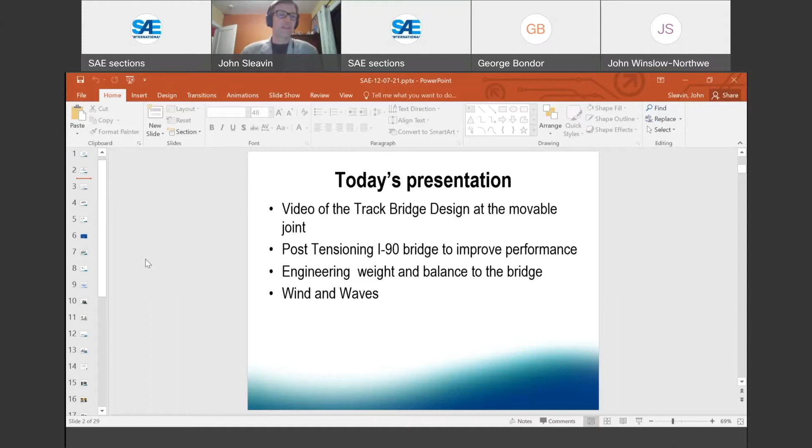So that's what today's going to be about — the challenges and the opportunities that we've looked at. Today's meeting, I'm going to go over a video of the track bridge and the movable design. We're also going to talk about post-tensioning that was added to that bridge, the engineering of weight and balance on the bridge, because the bridge is really a marine vessel that can't go into port. So keeping the weight, balance, and trim on that is very important. And then a wind and wave analysis. These are just some of the many challenges about putting light rail on the floating bridge.

So starting out with the track bridge — what is a track bridge? That's the bridge that bridges the rails from the fixed bridge to the mobile part of the bridge. If you're familiar with docks on a tidal place where the bridge goes, the dock would go up and down with the tides. The bridge does the same thing because the lake level changes. There's a transition slab between that movable part and the fixed part, much like a gangway between a boat and a dock.

So at each end of that gangway is a joint that cars kind of drive across. It's currently an accordion joint, but accordion joints don't work very well for a fixed rail system to go across it — that was our challenge here. There's 6 points of movement at those 4 different interface points.

Part of this development, we needed to define success, what we wanted, which was a comfortable ride at 55 miles an hour, our maximum operating speed. We also wanted to find what was acceptable going into this, so we knew our parameters. We thought if we had to slow down below 35 miles an hour at those joints, we really needed a different system and go back to the drawing board. Our goal was 55, definitely no less than 35.

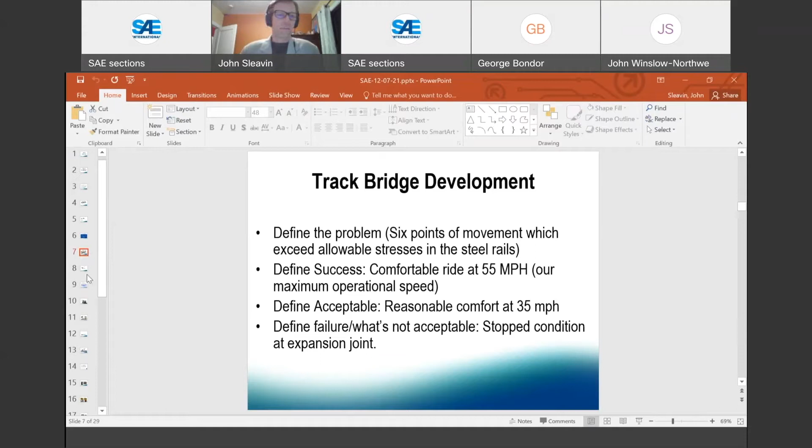So the evaluation criteria we were looking at was operating speed, speed restrictions from wind and waves or environmental issues during different times of the year, reliability, maintainability, and inspection. Once you open a rail system, your riders expect a very high level of service and maintainability. Making sure this track bridge system didn't require a lot of maintenance or have to go out of service and interrupt the connection between downtown Seattle, Bellevue, and out to Redmond, which is where a lot of the high-tech industries are located. Of course, ease of fabrication, initial costs, long-term operating costs, and customer impact. That's the last point, but really it's the bottom line, and that is the customer.

And our customers are those people who depend on this service daily.

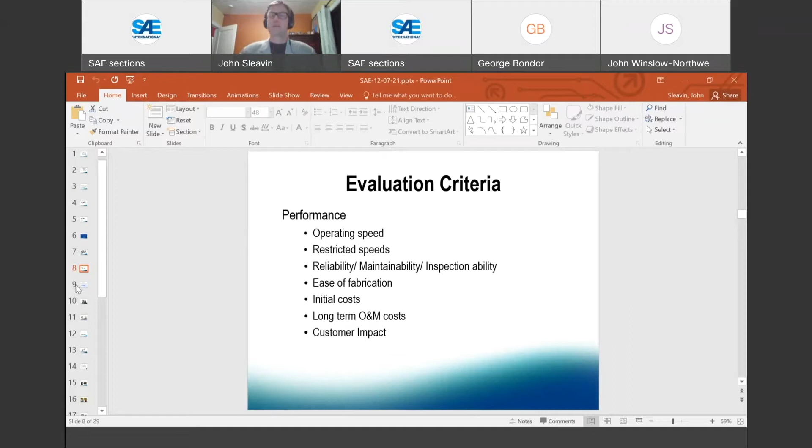So what did we come up with? We came up with what we called CESURA, which is a curved element. I'll play a little video on this, on what we're looking at here.

Essentially, what we have are 2 curved elements that each rail sits on. Those 2 elements, which are in blue, sit on 3 points, and we'll see that from underneath. Those 3 points are like a 3-legged stool. Why 3? Well, we all know that 2 points define a line and 3 nonlinear points define a plane.

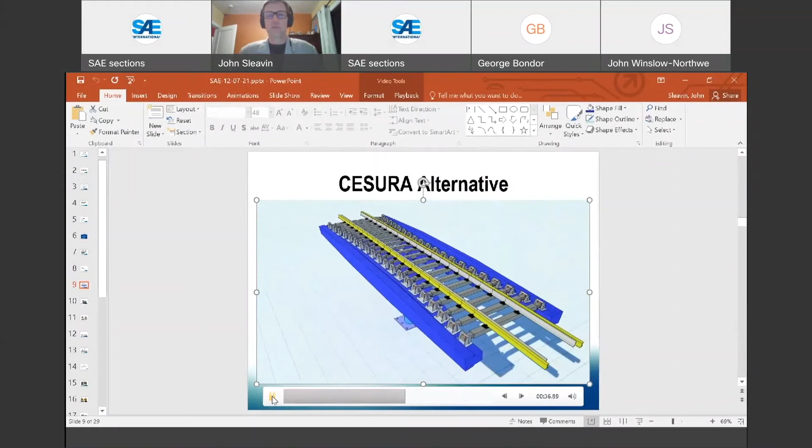So if we set these curved elements on 3 points, as that bridge goes up and down and flexes, each one of those wings, those blue sections, will always be in a plane. Now, if we attach the rails directly to those, then those rails would move apart and get closer together, and that wouldn't work very well. So we set those rails on top, because if they moved apart or got closer together, the train would derail or come off the tracks. So we set those rails on what we call bearer bars, or ties, that sit in each wing.

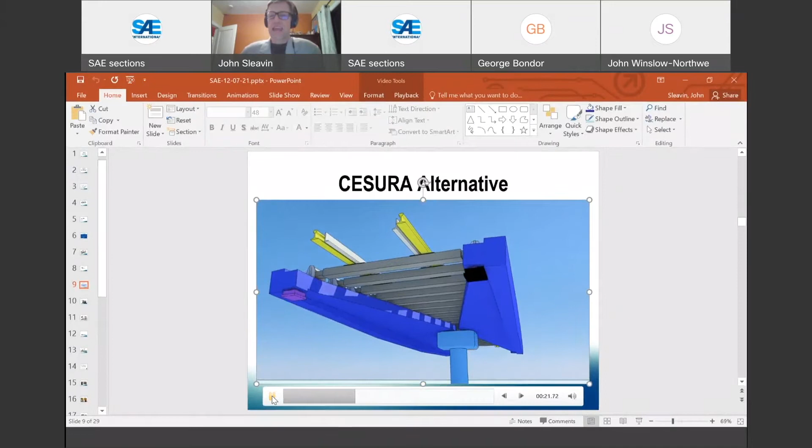Let's play this video again. As you can see, this bridge has an accordion joint that connects the fixed bridge to the moving bridge. So as that bridge moves up and down, the floating portion, this rail flexes to that position and allows that transition, a point transition, over about a 40-foot section.

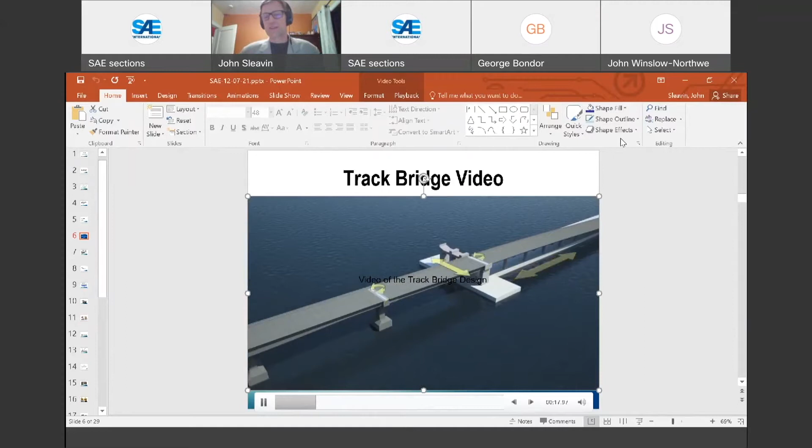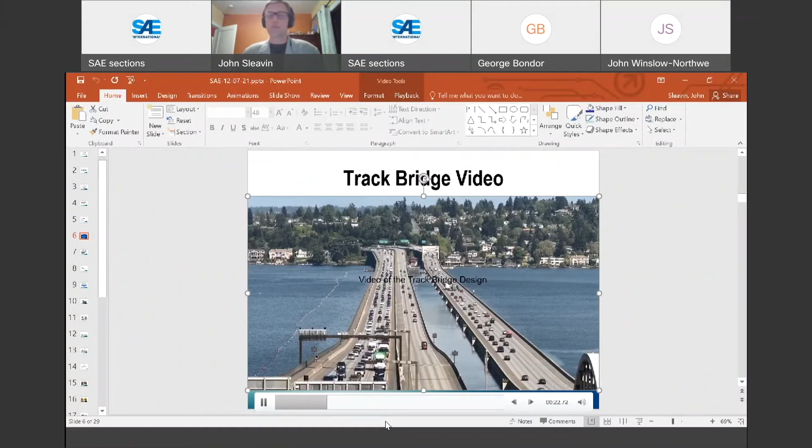So again, backing up here — what you have is a floating bridge on Lake Washington, and there are 6 different ranges of motion. The lake goes up and down as the temperature expands and contracts the bridge, and the wind twists it from left to right, or the loads of traffic twist that bridge from left to right.

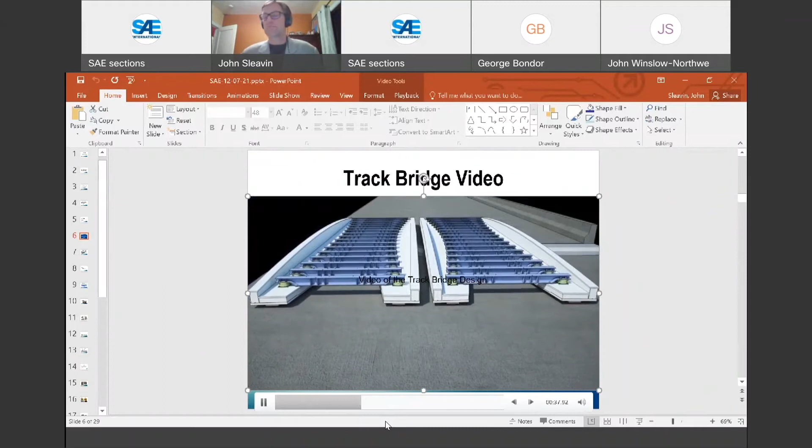So we put these 3 points which each of those wings sit on, and then we put bearings on top of that and connect the bearer bars across, and the rails on top. So as the lake goes up and down, we take that point movement and turn it into a vertical curve up and a vertical curve down.

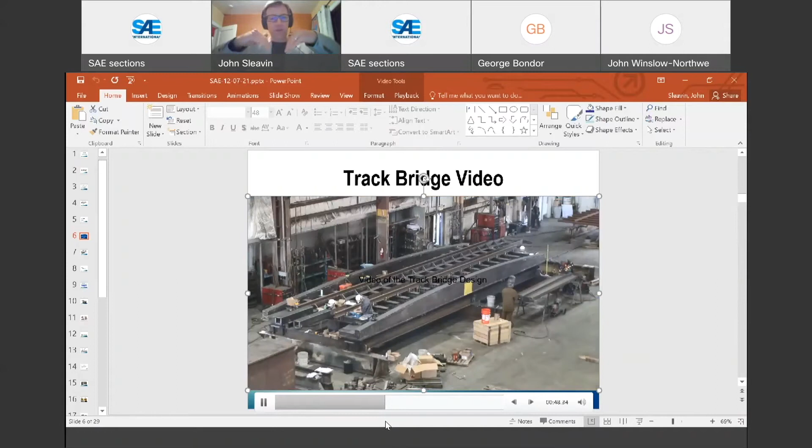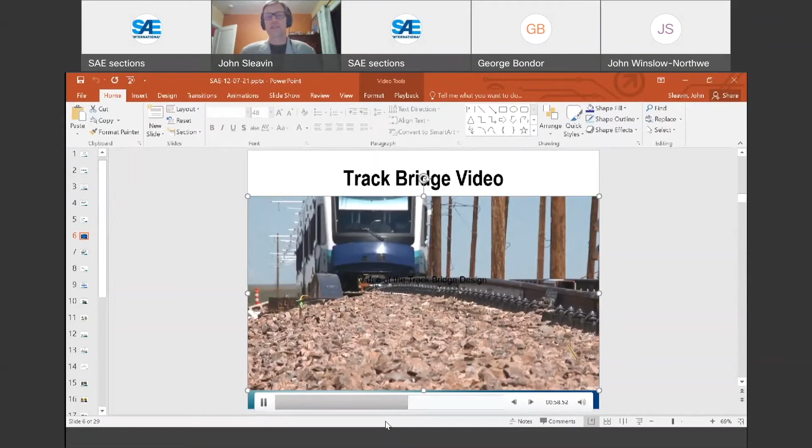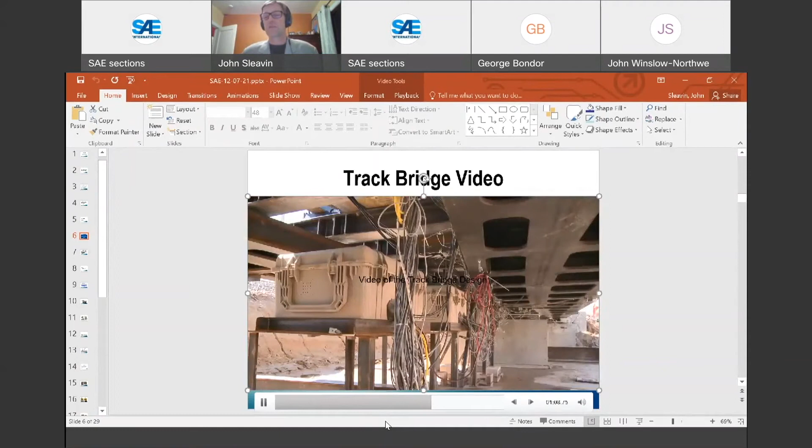So we went to Jesse Engineering Tacoma, built 2 of these prototypes, and then brought them to Pueblo, Colorado, where there's a 50 square mile test facility for rail. We built a mile-long track and mimicked the lake movements, and put 500 channels of testing on both the train and the track to understand what was going on with each one of those.

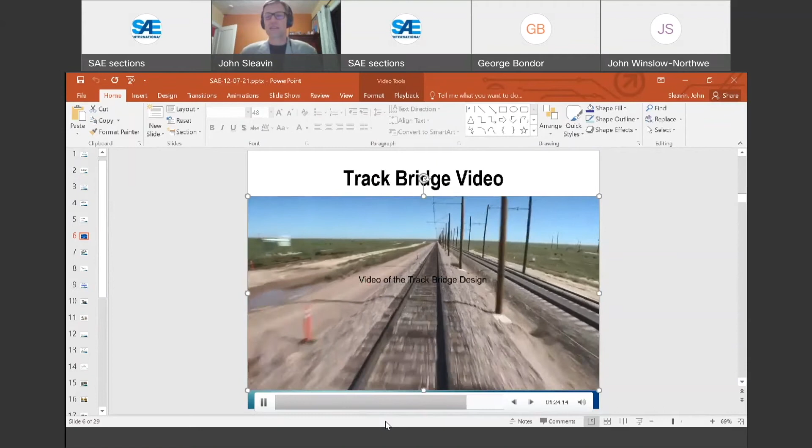So we put a lot of forethought and effort into this. We shipped two of our cars halfway across the country to run on that. So these are actually the Sound Transit vehicles in Colorado running on these.

Before we even built it out there to test it out, and what we found with all that testing was that at the design speed of 55, it actually worked pretty well. It had a smooth, comfortable ride. So it was great to check back in with that and make sure everything is working well.

And then here's just some of those pictures from Pueblo where we were working on, where we had built that track bridge. Clearly this was a lake during the end of the last ice age, but now it's just a huge flat plain. So we would jack the rails into the different positions as if the lake had moved.

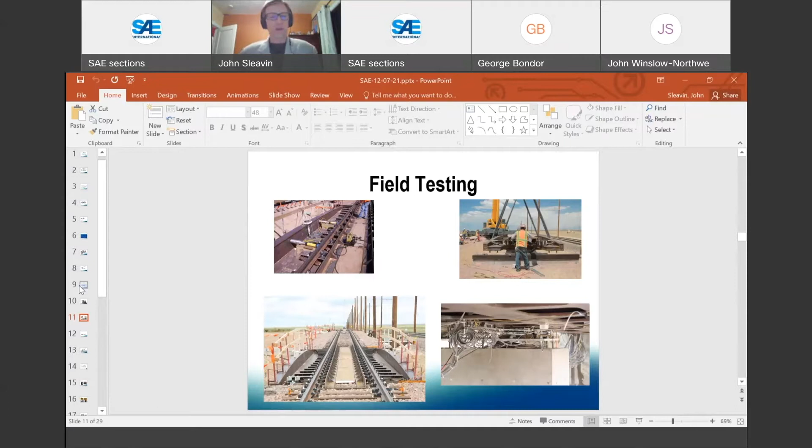And while the lake goes up and down, it moves about 2 feet from high to low, from late winter at the low to spring at the high, and then all summer long it slowly drains down. So the motions are very slow. But we proved all these different motions. We tested it out.

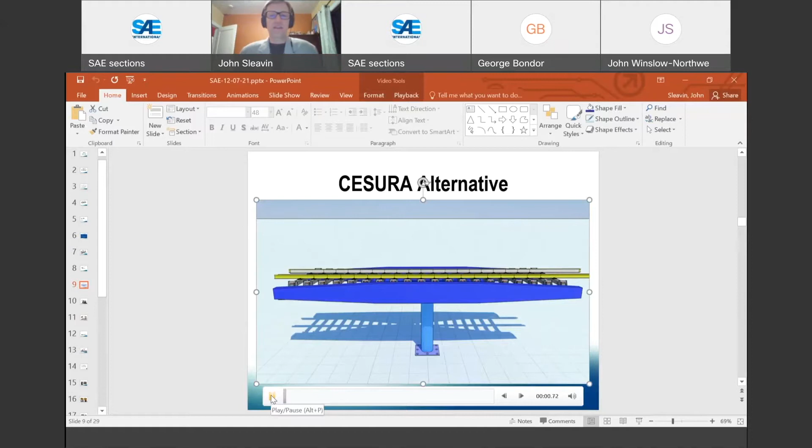And I think the big point here is that what we used on these components, it's not new and innovative, never done before. Most of these elements are off-the-shelf things. The ties that connect the rail, that's a system that's used today.

Underneath the bridge, what we set these things on, they were bridge bearings that you see at the seats where a bridge has expansion joints. Where the rails, the bearer bars, connect to the wings, we use what are called double pendulum bearings. Again, those were developed in California and they're used on bridge technology, never used in this situation, but we took that technology and used it here.

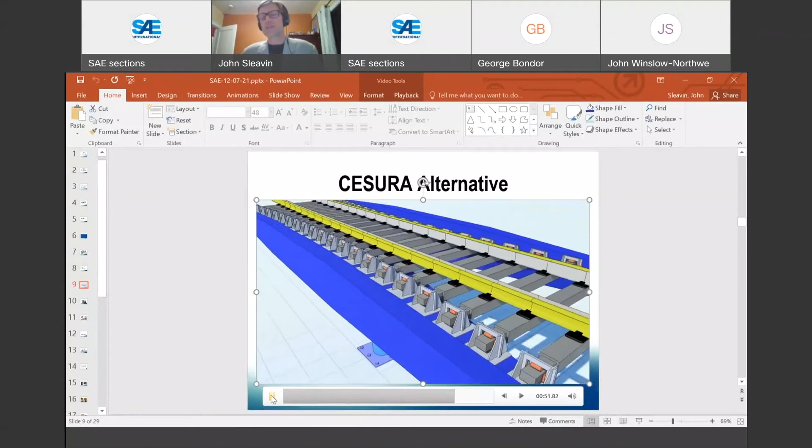So we try to take off-the-shelf components, arrange them in a different way, and then apply it to this. And we took what was theoretically, in the computer, over 70 KSI stress in rail that can only handle 60 KSI before it snaps, and brought it down to about 3 KSI of stress in those rails from these movements. So well within the working range of that system.

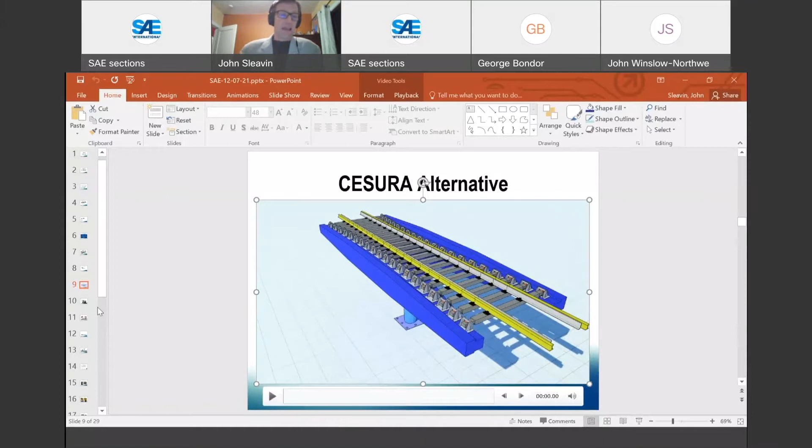And we did it by a lot of advanced planning. We did computer models first, of course, to simulate this. We then did a full-size component mock-up and brought that to the University of Washington Structural Lab and tested components there. We didn't actually learn what we were expecting to learn there, but we did learn how to put it together a lot better. It's just too small a facility.

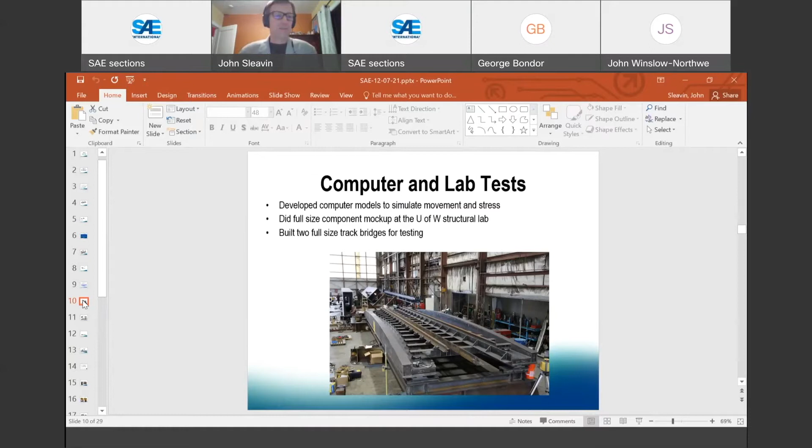So our next step was to build these two full-size bridges, which we did down at Jesse Engineering in Tacoma, and shipped those to Colorado and tested them there. Again, those are the photographs.

And I guess the big takeaway on this is, granted, no one else is probably looking, since this is the first time in the world anyone's put light rail on a floating bridge. Not likely a lot of other people are doing this in the future.

But the takeaway was define the problem. We had a lot of folks that wanted to define the problem. We had a lot of people who wanted to define the solution, jump to that next point. But we really stressed defining the problem, going through it systematically, defining failure, what worked and what didn't, to sufficiently get us there. There are some smart people who really wanted to jump to some other ideas, like, well, this is the right thing.

There's some concepts called 3 beams that have been used on suspension bridges, but those only have 4 degrees of motion versus our 6. Before going there and trying to retrofit that, we really had to step the team back and make sure they were looking at what's unique, what are we doing here, and that really helped streamline this.

Also, again, as I mentioned earlier, off-the-shelf components. What are those things that we know how they perform, what they do? How do we incorporate those known types of items into this product so everything isn't new? What we're doing has never been done before, but let's not make it super complicated by making everything new. The more we can use proven products, the more those things don't have to be tested, and we can test the system rather than each individual item. And then, of course, we refined these products as we went through this process.

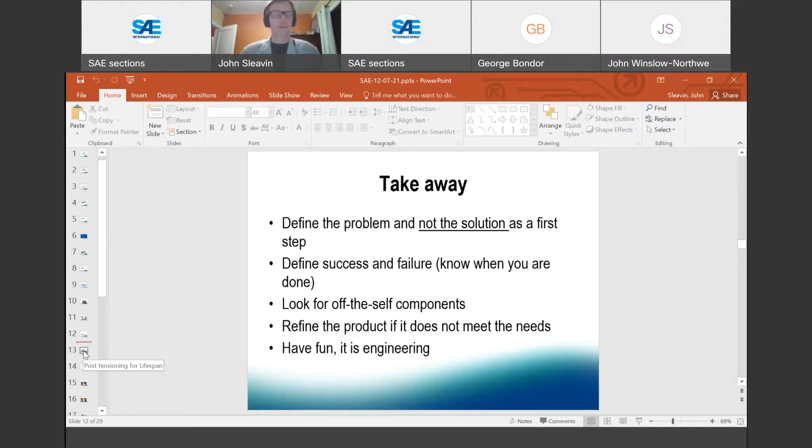There are also other challenges on this bridge, not to think that just that expansion joint was it. One of them was the lifespan of this bridge. As was mentioned earlier, there have been a number of floating bridges that have had challenges. These are the longest floating bridges on Lake Washington anywhere in the world, and they're serving interstates and 6-lane highways. So they're large bridges. This one on I-90 is a mile-long floating bridge.

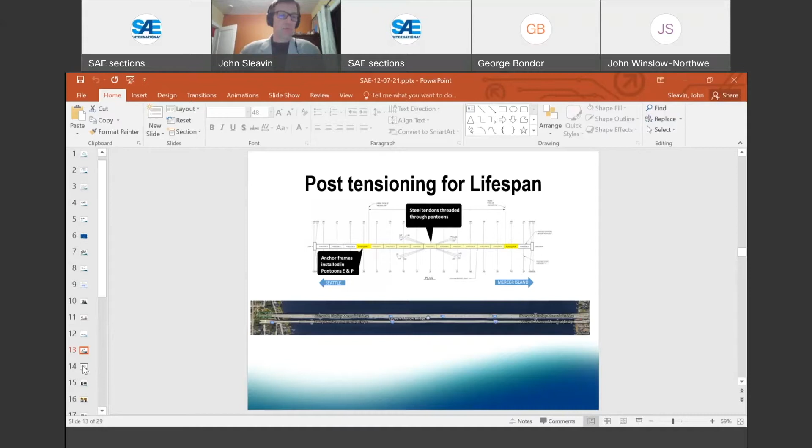So we're doing a major investment putting light rail on this, so we wanted to make sure we had a good lifespan for this bridge. In investigating it, we realized that the way this bridge was constructed was great. It had to fit through the locks that connect Lake Washington to the saltwater in Puget Sound. So this mile-long bridge consists of approximately 400-foot wide long pontoons that would fit through those locks and come into the lake. Then each of those pontoons were bolted together, and a bridge deck with cantilevered sections on either side were hung off this to make the final road surfaces.

Each one of those pontoons consists of 5 cells wide and 10 cells long, and it's essentially like a submarine inside of each one of those cells. So each one of them is individually watertight to make sure in case something were to happen and get a crack, a leak, it's very contained. But each one of these pontoons was just bolted together.

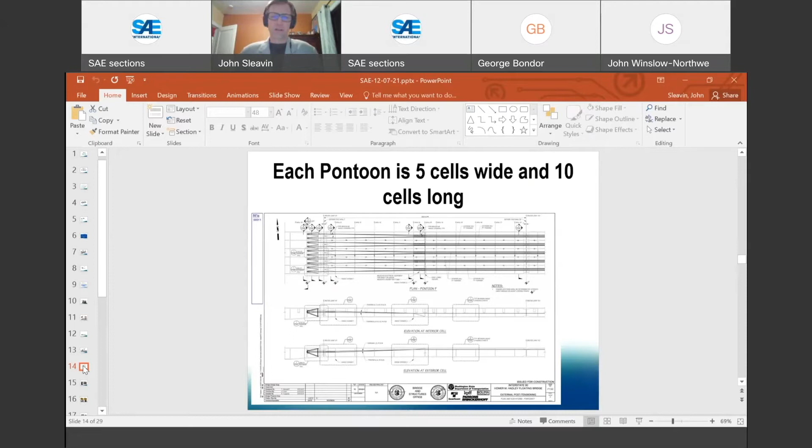What we decided to do was post-tension this bridge 20 years after it was built and do a mile-long post-tension. As far as we know, it's the longest post-tension ever done in the world, and it was retrofitted into this bridge. So that took a lot of engineering analysis. Inside these pontoons, we had to put in reaction frames to jack these cables against and do the post-tensioning.

So again, we went to Jesse Engineering in Tacoma. They built up these jacking frames that would hold those cables that we'd eventually jack against.

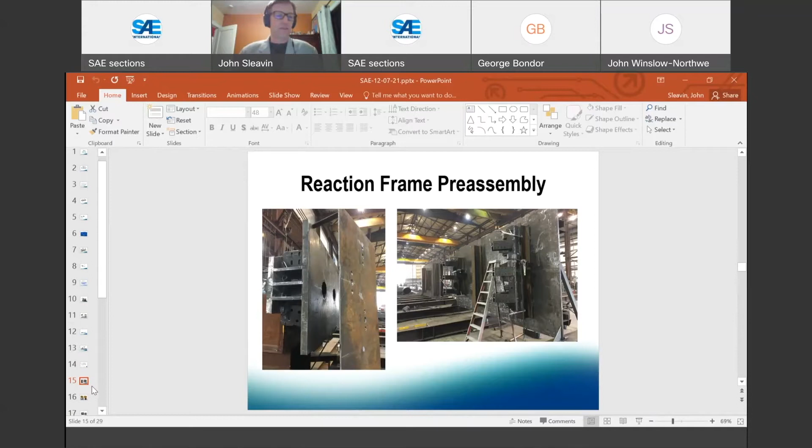But they had to be installed into this bridge. Like I was saying earlier, these things are 5 cells wide, 10 cells long, and each one of these 400-foot segments totals a mile long. We had to break that jacking frame down into small pieces, lower it through a hatchway in the bridge, which is a maintenance access.

And then, where I said it's like a submarine, there are marine doors between each of these pontoons that we had to move each of these pieces through to the end of the bridge and then install them. Once they got into that end pontoon, they had to be within 1/16 of an inch where they met up against the concrete surfaces, because we were going to be jacking them with a lot of pressure against that. So again, we used LIDAR, a surveying technique, to understand where all that bridge work was, mocked it all up, measured it, and then brought all these pieces in one at a time.

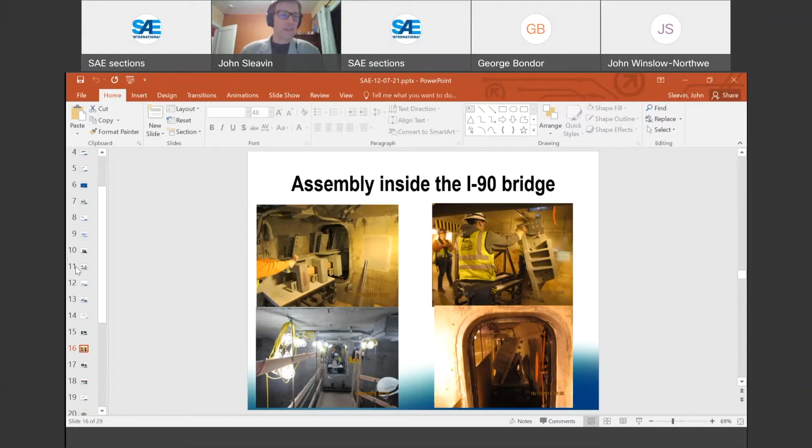And then here's just some more pictures of where we brought that jacking frame in on the right, poured a concrete blister up against that. And on the left, we're kind of looking down where those cables are going to come out of those holes.

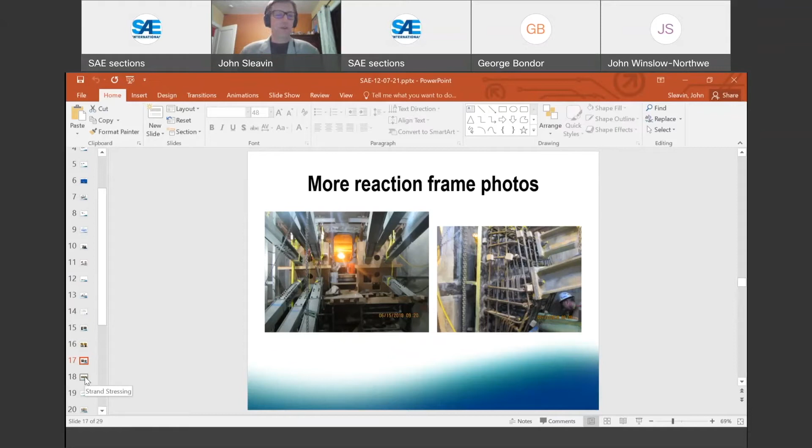This is one of the 5 pontoons on either end of the bridge that we were going to pull and jack this from. In the end, after we post-tensioned that bridge, we shortened the length of that bridge by 4 inches. So think of concrete as not very compressible, but in a mile, we put that much force into that. What this did is greatly increase the strength of this bridge and made it act as one continuous unit.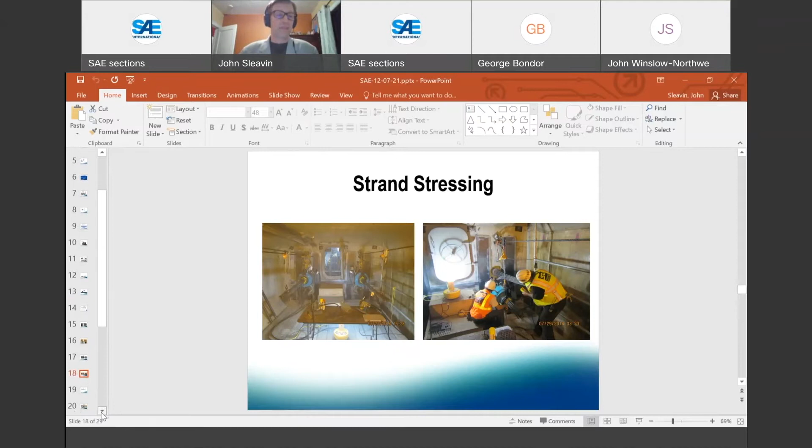Much as the way that a lot of bridges are post-tensioned. So that alone, we think, added a lot of strength and brought up the design life of this bridge, so it'll be serviceable for many, many more years once the light rail begins on this project.

Other challenges on crossing the bridge was stray current. Our light rail system operates with an overhead catenary system, and the rails themselves are the return current. So that means that we have electrified current running across those rails. We have to make sure stray current doesn't come off those rails, get into the bridge, and then start a corrosion process on that bridge.

Again, it's a marine vessel. It sits in water. While it's fresh water, it's a very conductive medium. And getting stray current into the rebar of that bridge would accelerate the corrosion of that bridge and obviously greatly shorten its lifetime.

We also have to attach those tracks to the bridge. Our normal system of how we attach to an elevated bridge would have required somewhere around 18,000 holes drilled into an existing bridge deck that was post-tensioned transversely. While we post-tensioned the length of the bridge deck, side to side was already post-tensioned. So we couldn't really risk harming any of those penetrations.

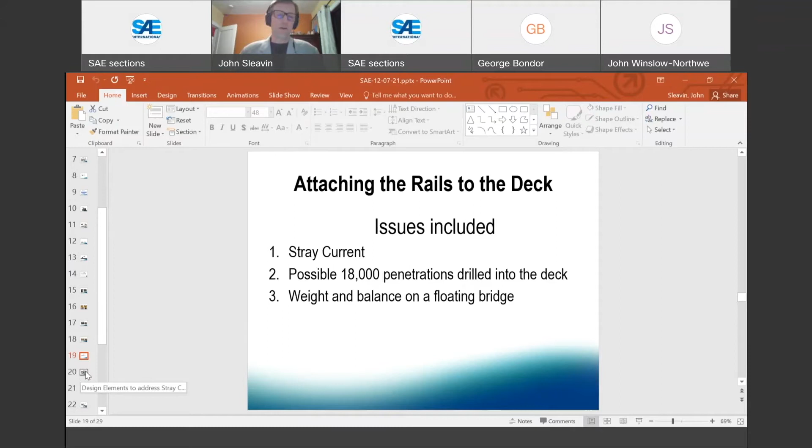And then finally, we have the weight and balance. This is a marine vessel. We can't lower it too much in the water or twist it from one side to the other.

So on the stray current, we went with belt suspenders, and I like to say belt suspenders and someone else helping hold up your pants. So you see the rail on the top there. We have a clip beneath there with a high isolation fastener, or basically an isolator.

Underneath that, we used a high isolation material for a drip edge. So any water that would fall on the rail would then come to this cap and it would flow off the side. So any electrical current that might come off in a rainstorm wouldn't have a continuous path to the deck, because the drip patterns would keep that water from being continuous.

Underneath that cap, we put a steel band around our concrete plinth to pick up any stray current that might be on the surface of that block. And then what you see there is a little nub coming out. We connected each one of these stray currents with a wire, one to the next, and brought all those connectivity points off the bridge. So any stray current that got into that band would get picked up by this wire taken off the bridge before it could get into the bridge deck.

And then on top of that, we did a high polymer coating on top of the bridge deck around the rail. So if even some more current got down there, it couldn't penetrate through that. So again, belts, suspenders.

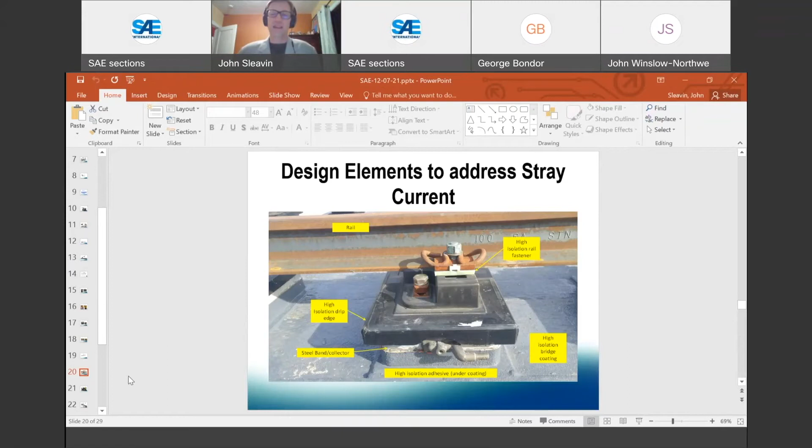We wanted to make sure that we did nothing to harm this bridge and everything to preserve its life. It's a huge investment that the national government made in the interstate system, that the local taxpayers made by their match and by them voting for light rail as well.

So how did we attach to this bridge? We said we didn't want to put 18,000 holes in there. Well, first of all, we took the plinths. The design on those was a very lightweight concrete. So we used almost a pumice in those because we didn't want to add too much weight to this bridge deck. Then after we poured those, underneath it, we poured a material called Cork-O-Last, which is sort of a spongy epoxy, if you will, that helps absorb vibration.

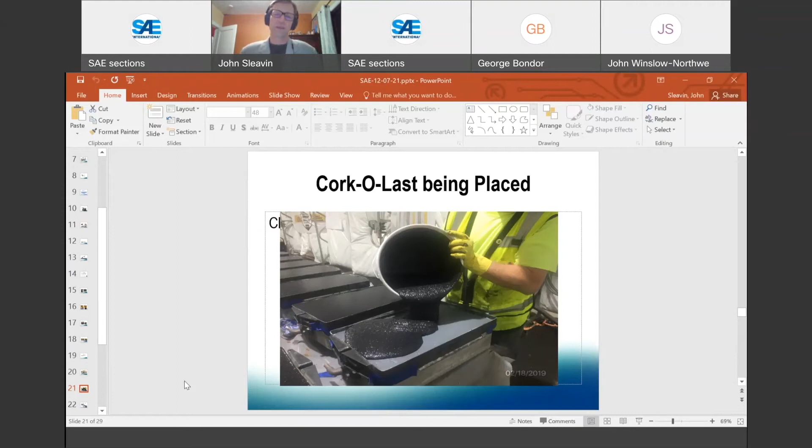And then those blocks were brought out and poured, jacked up on the rails, and we poured a two-part epoxy underneath them to basically glue these down to the bridge deck.

Now, we're not just gluing and hoping it works. Again, here we did a lot of testing. We looked at some materials that have been used in Europe for similar but different purposes. We took those to the University of Washington lab. We pushed them, we pulled them to make sure that they didn't stick to the deck so much that they'd rip the deck off for some reason if they were pulled too hard. They failed in the material themselves, so again, we wouldn't damage the deck of the bridge.

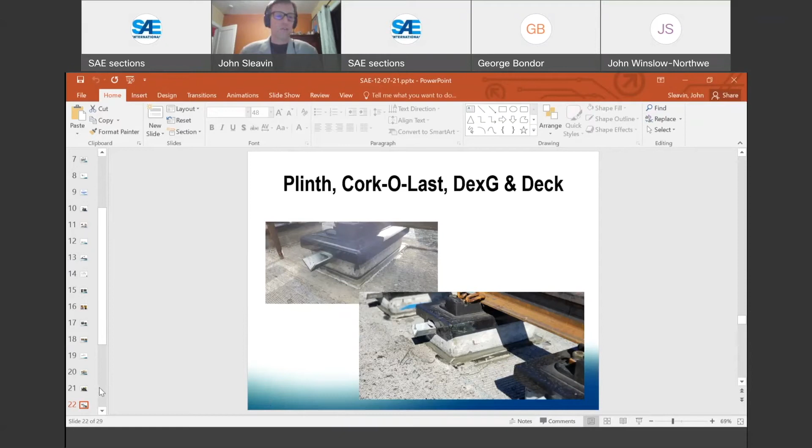We also sent a few of these blocks to Chicago and did accelerated environmental testing. We did freeze-thaw cycles on these things in an oven-freezer sort of element to see how they lasted long term. Again, a lot of testing, a lot of thinking about how these all work together to ensure the long-term durability.

Here you can see the completed system where we've got that polymer on the deck, and we've got these blocks that we've connected. Rather than normal railroad ties, where you'd have a continuous block across, since weight was a big issue on this bridge and we didn't want to load too much weight, we connect each one of those blocks with a steel rod, which is a lot lighter.

Each one of those rods also has an isolation between them so we don't pass currents between those two rails. That third rail you see is what in the train industry we call a guardrail. In the highly unlikely event that a train were to derail on a tangent section, that rail keeps the train from going off the tracks too far—in this case, off the tracks and into the lake. Obviously not something we want to have happen, so this guardrail catches it. That's an industry standard used by freight railroad companies. You'll see it in a lot of places on railroad bridges, making sure they don't have any derailments.

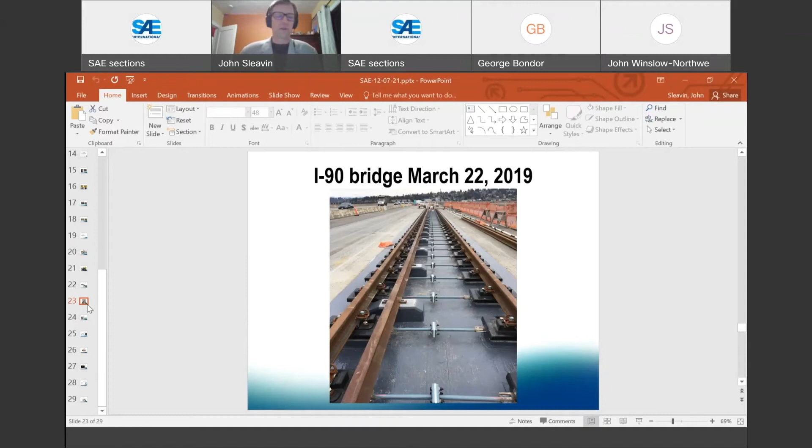But we wanted to look at how much stress is going into this, how much stress are we adding to this bridge based on the light rail. This bridge was built under different engineering codes at the time, bridge codes. They're not seismic codes, because there's no seismic activity on the lake, but wind and wave are one of the big drivers. So we wanted to reevaluate all that and see how much effort was coming into the bridge.

We also knew that in a huge storm, the State Patrol will sometimes stop operations on the bridge. So we want to understand environmentally, when we get a big storm like that, are we adding more stress to this bridge? Do we need to start removing automobile traffic or light rail traffic to take some of the structural load off that bridge, since that structural load is being eaten up in a major storm event?

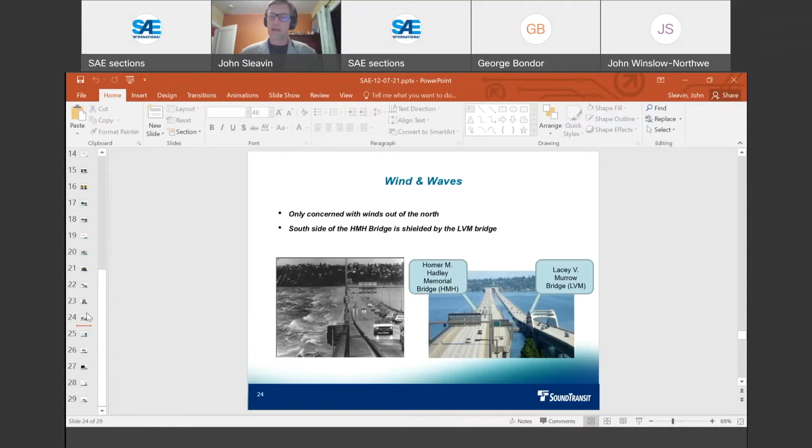So we had to do a big study on the wind and waves—where they're coming from, what's the fetch on this. We had marine engineers involved in this project, and climatologists looking at where these storms come from. We actually learned that while the design was based on a storm from the south, which is where most of the large storms come from in the Seattle area, we do get some freak storms that come from the north, and the fetch, or the distance the lake has to build up waves, is much greater to the north than it is from the south. So that became the design storm, which was different than when this bridge was built.

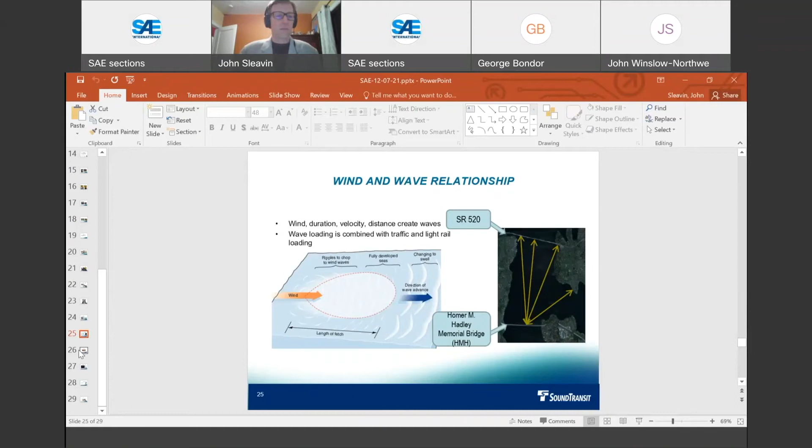They had assumed the storm was out of the south. So that was, again, part of the reason we wanted to post-tension the bridge, and then understand at what point maybe we wanted to start mitigating the loads on this bridge by reducing the traffic.

What we learned is that the average wind speed, about 25 miles an hour, really has no impact on what we're doing. But when we get to about 30 miles an hour sustained wind—these aren't wind gusts, but a sustained wind over a period of time—I'll get into how we measured that.

What we'd probably do at that point is mitigate by only single-tracking, putting one train across this bridge at a time, making sure we have a system to only allow one train on the bridge. That takes a lot of the load, because the design is two trains on that bridge right next to each other with four full lanes of traffic on the other side—so a fairly loaded-up bridge. By making sure one train is not there, it really lightens the load. How does that impact our customers?

Well, it takes a little over a minute for the train to go across this bridge. And we have 6-minute headways or 8-minute headways when we open, probably 6 in the future. So really there'd only be every 3 minutes a train crossing. So theoretically, only allowing one train on the bridge at a time shouldn't impact our service. But sometimes, just the way the service runs, you might have 2 trains out there. So probably relatively little impact.

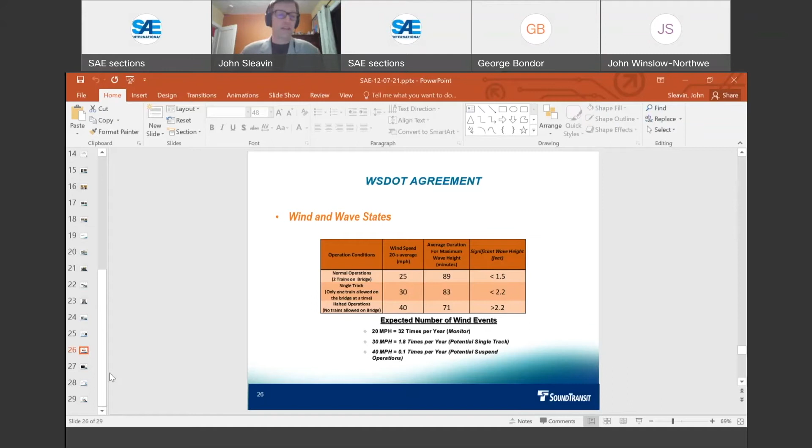And again, the most important thing is making sure this bridge survives. And then WSDOT also has the ability to then take traffic off at about that speed too. Generally, they tend to take traffic off because when the winds get that high, cars start swerving between lanes, and it becomes not so much a bridge structural load, but more of a traffic safety load for drivers not staying in their lanes. And that also then would greatly reduce the stress. And then once the winds drop below 40 miles an hour, we start the operations again.

But we had to figure out, really we're basing this on wind, but what we care about are waves. If you think about it, you're out in the environment, you get hit by wind, it kind of knocks you around. If you've ever gone wading knee deep into an ocean and a wave hits you, it'll take you off your feet, and that's just a small wave. So really what we care about are waves. So we had to figure out how to translate wind and direction into a wave height that actually adds structural load.

So here's a case where, instead of world-class scientists, we partnered with college students doing their senior projects, who came to us and said, what do you have? What can we do? What can we work on? And we talked about this. They found these buoys that do wind, solar buoys we put out in the water. And for a year and a half, they monitored the different wind, the waves, how those correlated, because this also had an accelerometer on it to tell how high the waves were.

So then we could correlate wind direction, wind speed, length of time, and when waves build up, so that eventually we can just measure the wind and the direction, put that into an algorithm that tells us what the waves are, and where we have to have a problem. Because if we have 40-mile-an-hour wind, but it's going east-west and not building up waves, we really don't have a problem. So again, we reached out, we used the community.

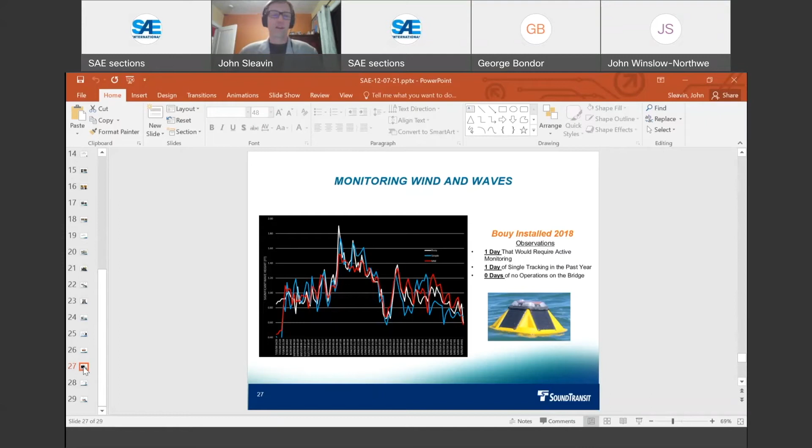In this case, we used a lot of students that had a lot of enthusiasm, spent a lot of time researching on the internet, doing different things, putting these things out there. It was a great project, and we learned a lot. Clearly, it took some of Sound Transit staff time to work with them, but I think it really helped develop a lot of our young engineers, which is so important.

And these are just some of the monitoring and the waves and what came out of it, the data that they came out with.

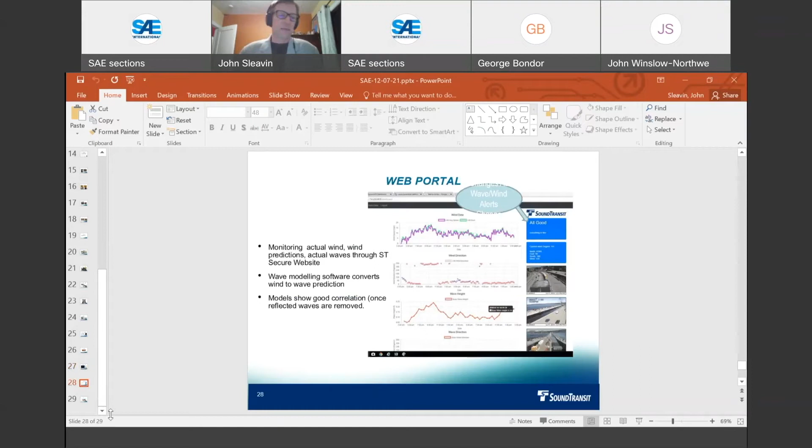Essentially, it was a project we had to think about from top to bottom. We had 23 different critical items that the independent review board talked about, that WSDOT and the feds, Washington State Department of Transportation and the Federal Highway Administration, said until you answer those 23 questions, you can't put light rail on this bridge. And that was great, it was an independent group. It was arduous to go through, but it was important. It gave that independence, they looked at it, set up a lot of things, and we found a lot of other things since then going through their issues, to really make sure we thought about each one of these questions. We took a lot of time.

This is a critical piece of infrastructure, today as just an interstate, but in the future as it connects transportation. The takeaway I'd really like to put out is using that community, using the young engineers of tomorrow, using those knowledgeable engineers from all over the world, all over the country, listening to them, understanding what they're saying, taking that time to make sure people could question you, and that you were open to those conversations.

Okay, my first comment is thank you very much for this very detailed explanation. I now have confidence I can drive across the bridge when the train is on the bridge. But I do have a question. You mentioned the wind creating waves, and you talked about this fetch distance and whatnot. What kind of wind does it take to blow over one of these trains?

So it's not blowing over the trains, it's the wind building up waves. The waves strike the bridge, and the bridge is a very long beam, so it bends that beam. Each end of the bridge is anchored out there, so it drifts a little north and south, it's not rigidly held, as the wind blows from the north and the south. As it blows stronger and stronger, it pushes against one side. It'll move, if the wind's coming from the north, it'll move to the south. As the wind builds up, more and more waves hit it, striking the beam one after another, so it just adds sideways load to the bridge. So you have this bending beam action.

You then get torsional load from the vehicles, light rail and automobiles, going on it. You get twists as those loads move, because you might get heavy trucks for a while, then the trucks leave, there may be a gap in traffic, so the bridge moves back up. So it's constantly moving, very slowly, but it is moving. So that's all about structural loads on the bridge.

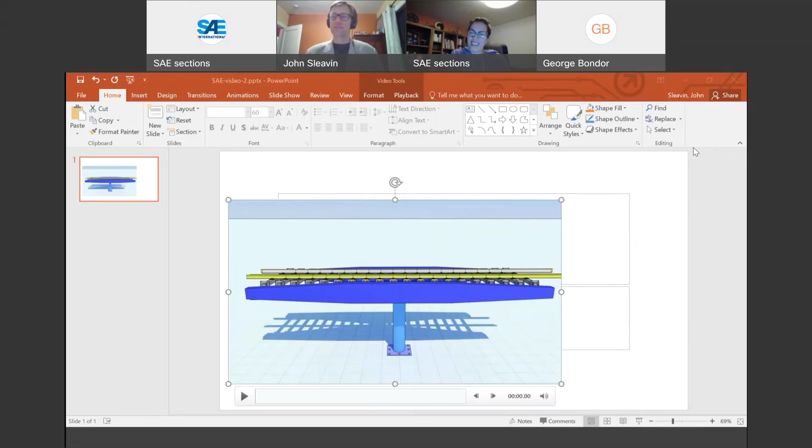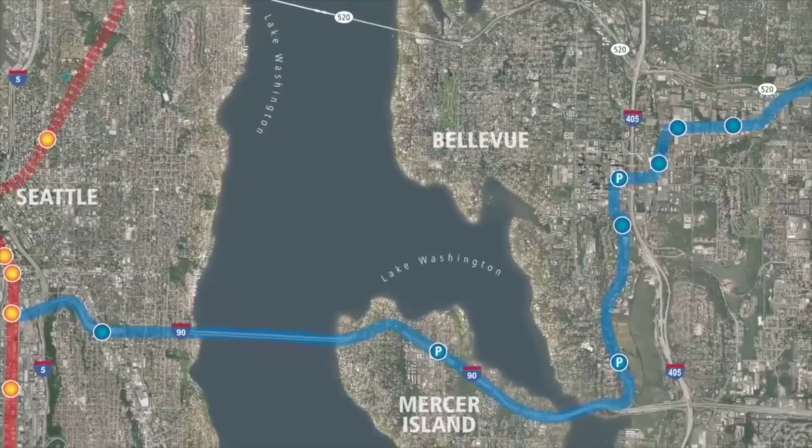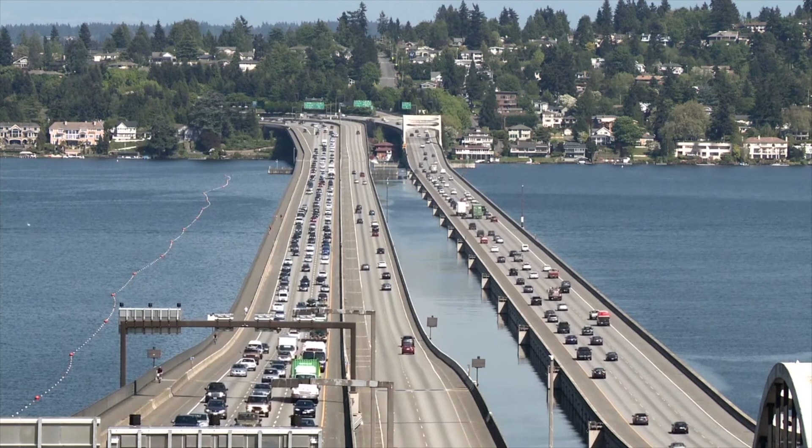When the new 14-mile East Link light rail opens in 2023, riders will have a brand new option for crossing Lake Washington between the east side and Seattle. With shifting lake levels and weather conditions, the tracks need to accommodate 6 different ranges of motion as they cross from the fixed bridge to the floating portion of I-90. Even though these motions are barely perceptible, it's important to accommodate the transition with a system called a track bridge. Because this is the first time light rail trains will run across a floating bridge anywhere in the world, Sound Transit enlisted world-class engineers to meet the challenge. Here's what they came up with.

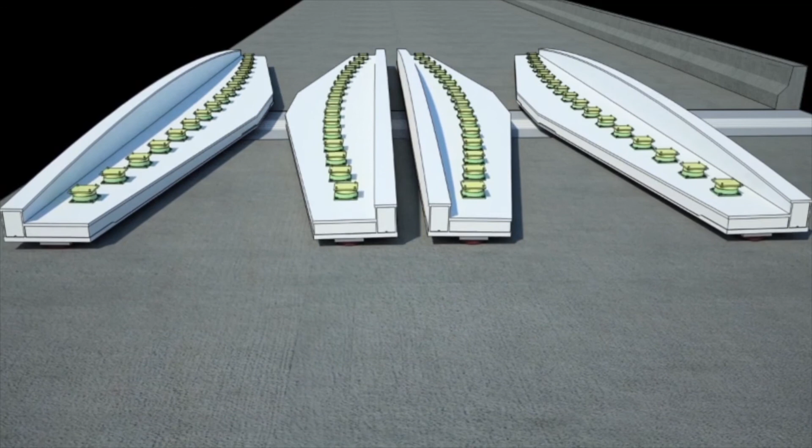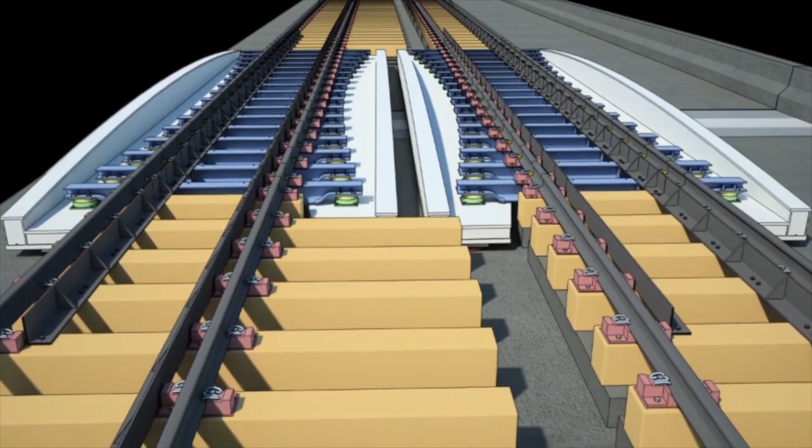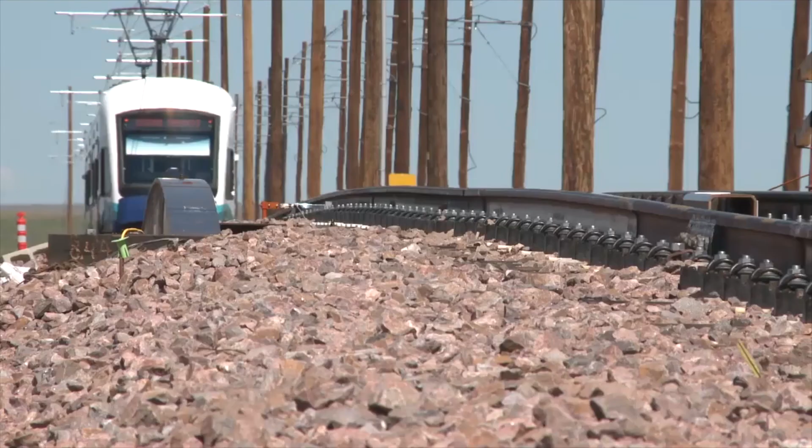At this transition, the rails rest on a series of bearings and plates that allow them to move with the changing lake and bridge conditions. Sound Transit partnered with Jesse Engineering in Tacoma to build 2 full-size track bridges and test them under simulated operating conditions in Pueblo, Colorado, home to the Transportation Technology Center. It was here where light rail vehicles ran hundreds of times over the test track bridges.

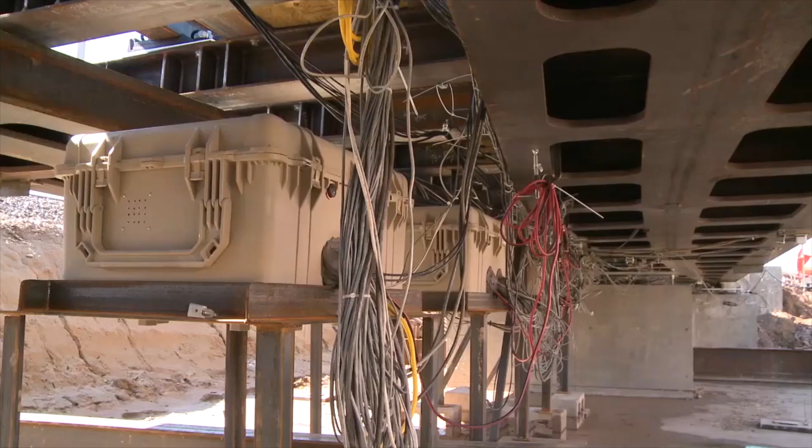In this controlled environment, we were able to mimic the forces and movement the track bridge will experience during normal operations. Engineers recorded more than 500 channels of data during each pass. Among other factors, the test monitored ride quality and stresses on the track bridges at various train speeds. The track bridges passed all the critical test criteria, and the ride quality on the trains was good at the planned speed of 55 miles per hour.

We're confident this technology will ensure a safe and comfortable ride for thousands of people every day when East Link opens in 2023. For more information, visit the project site on the web or sign up for the latest construction alerts.